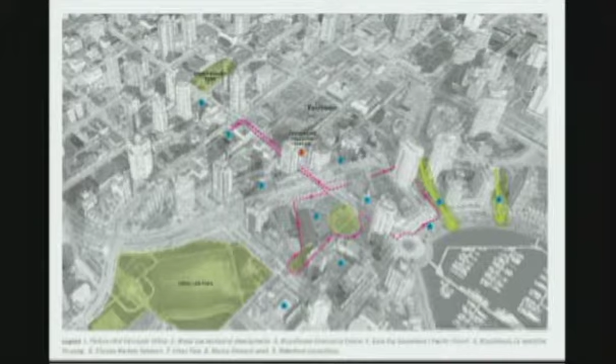And this is what I'm going to talk to you about today. Of course, it's nice to see graphics starting to overlap as well.

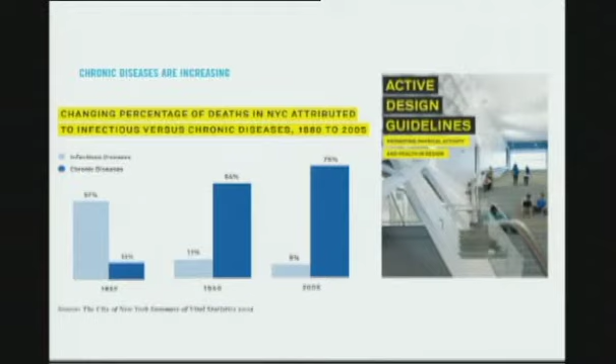I won't go into this because Andy covered it so beautifully. Cities are recognizing that relationship between design and lifestyle diseases, in this case chronic disease. New York City's been particularly good at this, and I'm imagining David and company are familiar with their active design guidelines - a wonderful compendium of how you start thinking about changing the city for active lifestyles.

So there are really 5 considerations that we bring automatically to our work when we're thinking about designing a community, and number 1 is access to nature. Cities aren't doing enough of this, and certainly with brownfield sites, it's an opportunity to be much more ambitious in your goals.

Connectivity is number 2, and I could easily have put walkability here, but it's all about giving people the opportunity to walk to as many places in their community as possible. And of course, this is also part and parcel of engaging with others in your community. So it's a big subject.

Diverse uses - Andy talked about mixed use and the importance of it, as did David, New York City and all its resources for people. You want walkability, but you also want the amenities and the services and the shopping and learning opportunities that go with it.

Housing choice is huge, and I know Naheed Nenshi talked just recently about the crisis here. That's something any new plan should be focusing on, especially when you've got a chance to build a critical mass of housing. And finally, renewable energies.

This is something our office has taken a lead role in. We have 8 sustainability research people within our office, which is a little bit unusual for a design firm. But we are very serious about helping cities understand how they can move that agenda forward.

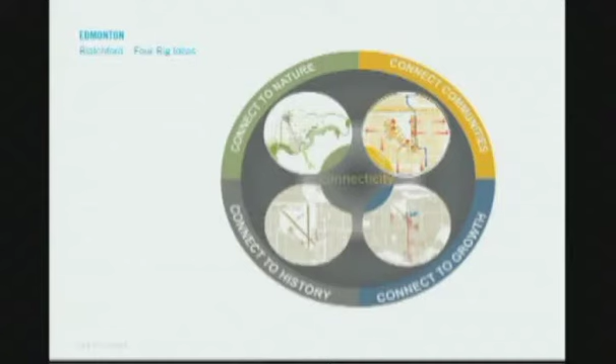And David used his arm. We thought as a team, how could we characterize this project in a really simple way?

And so we have a park, we have connectivity, we have access to growth and catalysts for growth. And finally, we have history, and I'll explain that.

Starting off at the top left, the overarching aim of the plan is connectivity. We, tongue-in-cheek, used the term connecticity to characterize that. But in a more serious vein, you can see in the top left-hand circle, Edmonton has a wonderful series of riverside parks, as does Calgary.

But what they didn't have at this site, which was quite a bit to the northwest, was any kind of significant open space. There were all the municipal reserve parks, but nothing really significant to bring the community together.

And so we saw an opportunity because there's an existing rail corridor that runs down the west side - you'll see in that circle - that would connect this park directly to that series of parks. We had an opportunity going east-west as well, and eventually created a 27-kilometer river-to-river loop, connecting this community back into the larger city.

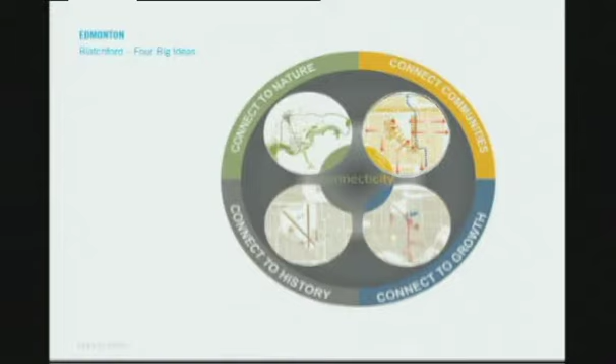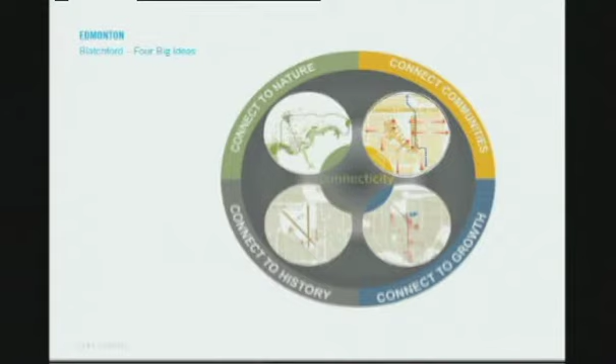Connecting to growth for a plan like this, any plan really, is huge. You want a plan like this to be viable, so you look around the site and ask what's here that can help us. Number one, the site's blessed: it's got Canada's largest technical institute, Northern Alberta Institute of Technology, 13,000 full-time students, soon to be 25,000. They'll be a partner on the site, bringing that student vibe and energy to the community. We also have a successful shopping mall immediately south of the site.

You wouldn't necessarily think this is a natural fit, but it absolutely is, because one of the hardest things to establish in a mixed-use community is new retail. Developers always struggle with that and end up subsidizing retailers for many years. With existing shopping here and a draw for people from all over Edmonton, there's a built-in attraction to this area. And finally, we're blessed by having Canada's largest critical care hospital just steps away - that's the Royal Alex.

And a rehab hospital right next to that. The idea is to bring many of the hospital services onto the site. There's a health agency that will be building there, and we're keeping our fingers crossed that former premier Alison Redford's idea of bringing neighborhood clinics to the city - I think the number was 143 for Edmonton - would be something that fits very naturally into this site.

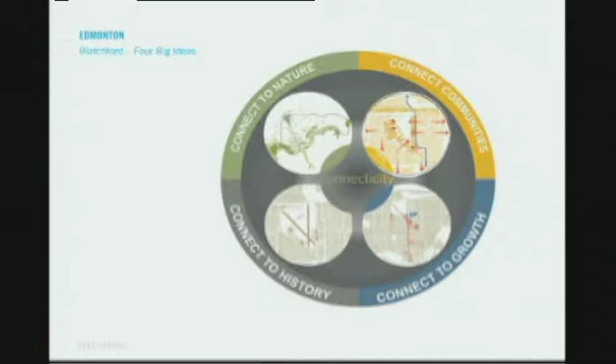Then finally, history. Connecting any community to its history is absolutely crucial. We used this for history because we chose to embed the runways into the plan rather than tearing them out and making them disappear. We also have the benefit of some World War II hangars, which are amazing places, the old terminal building, which is already a school, and the observation tower - these become artifacts on the site.

So this is the plan, and you'll see the park is really the centerpiece. There are three neighborhoods: on the westerly side, the agri-hood - the city had a huge ambition for urban agriculture, and this increases the city's urban agriculture by about 60%. The Technology and Research District is on the easterly side, benefiting from the LRT running right through the center and being immediately adjacent to NAIT. And finally, the town center at the lower neighborhood, right next to the mall, where most of the retail and commercial life will be - a natural synergy. It's going to be for 30,000 people.

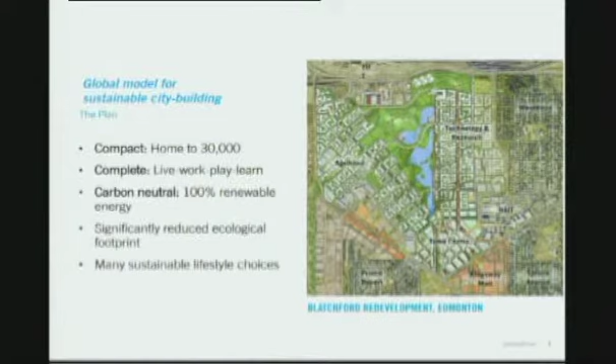In terms of amenities, it's live, work, play, and learn - things you want in a community where you can walk to them, so they can be part of your life. You can engage people and recognize faces every day as you make your way to shopping, to school, to work. We're also aiming at 100% renewable energy, meaning net-zero energy, again giving people those lifestyle choices.

This park allows people to really live in a park. 98% of the residents in this community are within a 2-minute walk of a park. That's because it's not just this park, but neighborhood parks beside it, and it's those connections to these amenities that are super important.

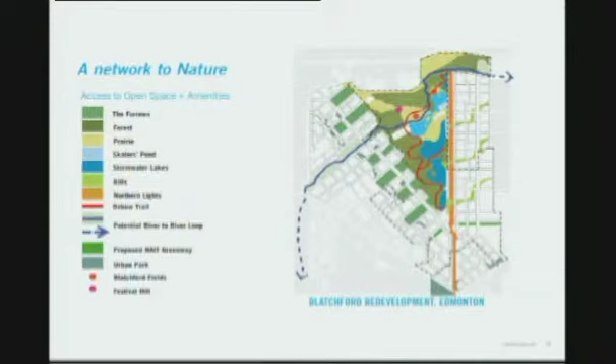As I mentioned, access to the park is super important. We have the main park, but there are also community parks that weave into the neighborhoods on all sides. The blue line is the river-to-river loop connecting this community back to the larger city. Lots of paths through the park, and of course all the roads lead to the park as well. Again, you see the Northern Lights, that orange band running down the right-hand side.

This is zooming into that Northern Lights amenity. It does have housing along it. We want eyes on the park and the streets, but mostly it's there for recreation and civic uses. There might be small galleries, small cafes, and some of the recreational uses are also imagined to be there.

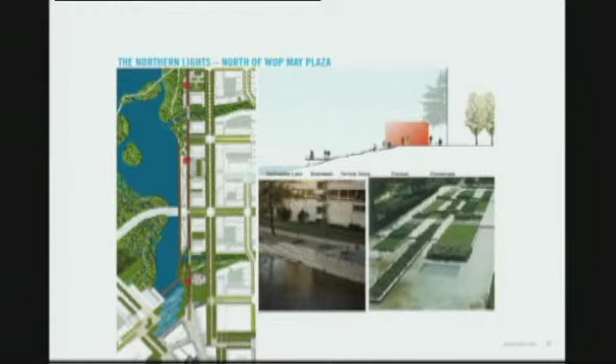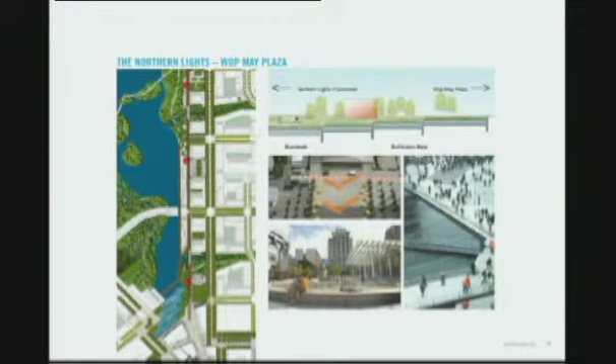This is moving down towards the epicenter of the community, which is Wop May Plaza—Wop May being one of the original bush pilots in Edmonton, celebrated here. Finally, the southerly portion of the Northern Lights starts to soften and become more green. This is where we're trying to bring a balance between this higher density neighborhood and access to nature.

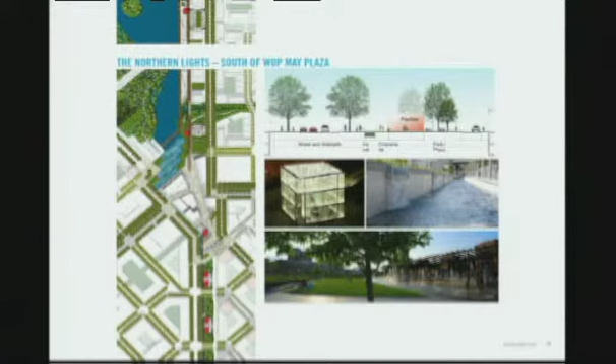I just want to go back to connectivity, which really has everything to do with mobility. What we try to do with the mobility networks in our plans is nest them as much as possible so they're interreliant, interdependent.

Here you can see the transit network on the left-hand side. There are two stations planned, and a possible third in the future. It's the purple line, and it goes through the site, crosses the Yellowhead Highway, and heads up to St. Albert—a real regional connection. All the other lines you see here: there's a tram that runs down the westerly diagonal neighborhood, and bus lines actually bringing people into the transit station.

To the right-hand side, this is complemented by the bike network. The policy in this community is that all of the streets, except the ones highlighted, are meant to be shared streets.

David talked about the idea of getting rid of streets and making it harder for people to drive. That's not the policy here. It's actually a policy of distributing streets—lots and lots of streets and lots of choices for drivers. They don't have to go barreling down great wide streets, but they do have to share streets with cyclists and generally drive a little slower.

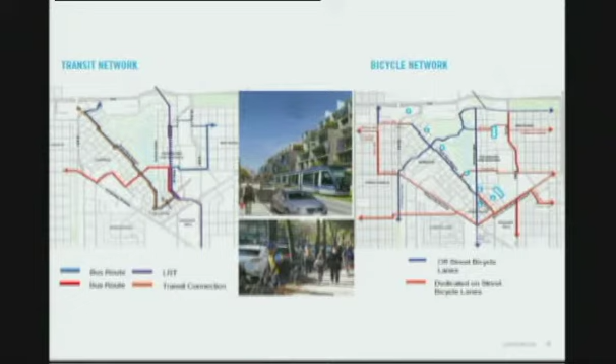The pedestrian is first in all of our street design—I won't get into the details, you have a great complete streets person at City Hall, and we're working on that with our city as well. The important thing is we're trying to make streets as intimate as possible for people. These great wide rights-of-way make it very difficult for pedestrians to feel comfortable.

In my experience on every single master plan, it's the engineers that need to be educated. They need their space in the street for their utilities, but if you work hard enough and long enough with them, you really can get them to compact it and lead to much narrower rights-of-way, which feel way more comfortable for people, especially in a windy environment.

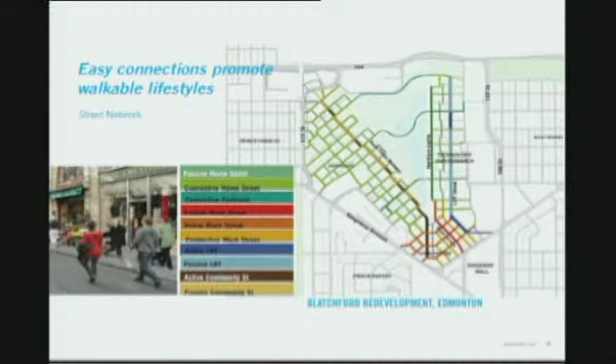We're working on one street in the Olympic Village that's 14 meters wide, the right-of-way. That represents probably the biggest war with engineers I've had in my career. But there need to be more of them, because it makes for a much easier walking and enjoyment of the streets.

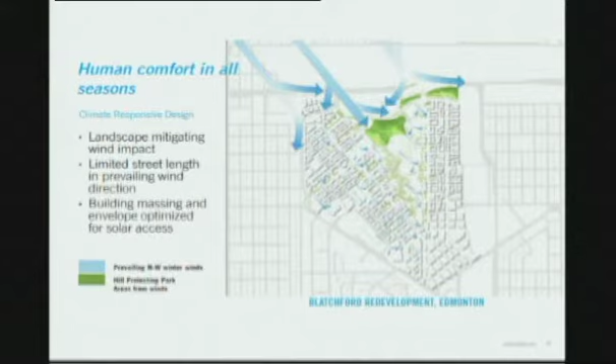And of course, in Edmonton, as in Calgary, climate responsive design of streets is paramount. We've offset the blocks so you don't get more than 3 blocks in a row, and they're relatively small blocks, so wind can't build up and make it uncomfortable to walk in the streets. That's absolutely key. We also have the huge benefit of the hill, which provides opportunities for people to use the northerly part of the park quite comfortably in the winter.

The other end, interestingly enough, we're currently working with the mall owners on developing a walkable community on their site. So it's kind of the dream of synergy for us.

I won't talk about it at length, but we worked very hard with the city to understand what this kind of mix would realize in terms of jobs. It stands at about 11,000 jobs, about 1 job per every 3 persons in the community. Not a bad target for a brand new community.

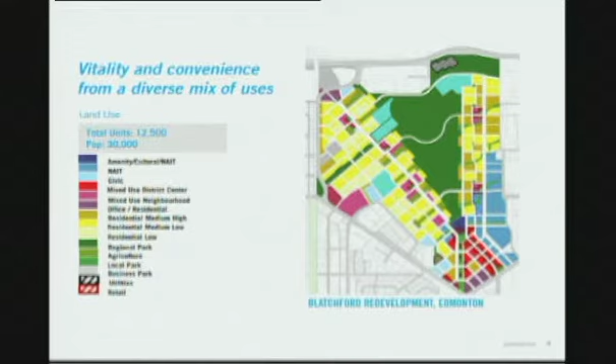There's also 3 schools, 1 elementary and 2 high schools, shown in light turquoise. And NAIT is a partner on this site. They're looking at bringing a lot of their programs into the town center, including their culinary program. They hope to have a bakery on the main street. They also have the biggest meat cutting course in Canada, so there's likely to be a butcher on Main Street as well. This opportunity to bring an educational institution together with the community is quite unbelievable. It's a real blessing.

So I just wanted to walk you quickly through the 3 neighborhoods, just to give you a bit more of a sense of the look and feel of this place. Starting with the agri-hoods, which is really focused on families. It's the lower density part of it.

You can see what we call Bush Pilot's runway in the top rendering. That's the primary armature built over the runway, showing the eventual tram route along that street. But you can see the attention to making it a great environment for pedestrians. That's our first focus, making it comfortable, making it easy for people to sit outside, to use the sidewalks.

They're very wide, and also give access to the trains themselves. Like Calgary, Edmonton has a high-floor system. We didn't want that to affect the edges of the street. We wanted to keep the street down at grade, so we elected to put the stations in the middle. That's not dissimilar to San Francisco's LRT system. It works very well. The stations are relatively discrete, and it means pedestrians in the street can move very easily.

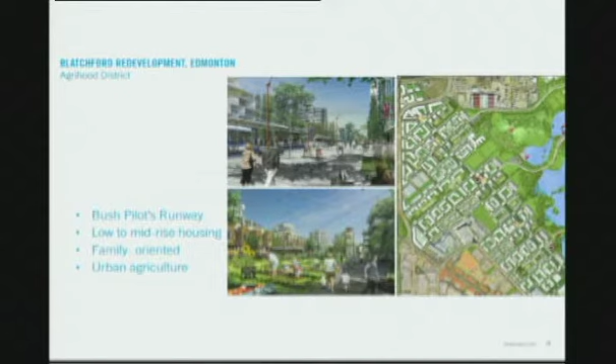The rendering at the bottom is what we refer to as the furrows. You can see the kind of agrarian geometry of this neighborhood, and this is where all of the urban agriculture opportunities reside. About 600 plots, but also some larger community-based plots, which you see in this rendering.

Very quickly on housing, just to give you a sense of the choice here, the city was very explicit. They wanted housing choice and did not want single-family housing. The only single-family housing has to be net zero, a handful of 50 demonstration houses. All the rest in this neighborhood are 2 to 4 stories, very comfortable walk-ups, and a lot of row houses.

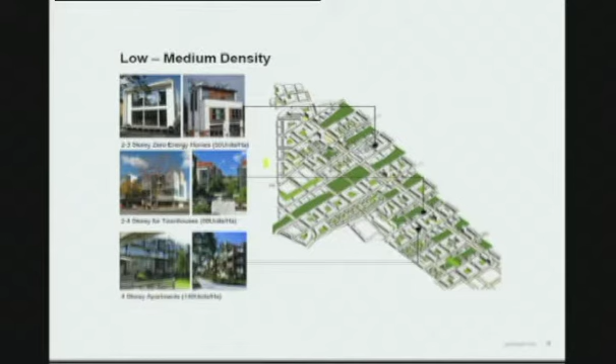The Technology and Research District, by virtue of the fact it's got the LRT running through it, is clearly the place where you want to put your density. This is where you want to make it easy for people to access transit, and it's also the place that serves the NAIT students who commute every day in and out of the campus.

The green space here that connects through to the main park is more of a meandering corridor, but it does have a job: it carries stormwater. The top rendering you see here is a depiction of one of those green fingers, a little more urban and dense than you might imagine, but nevertheless a kind of working green lung.

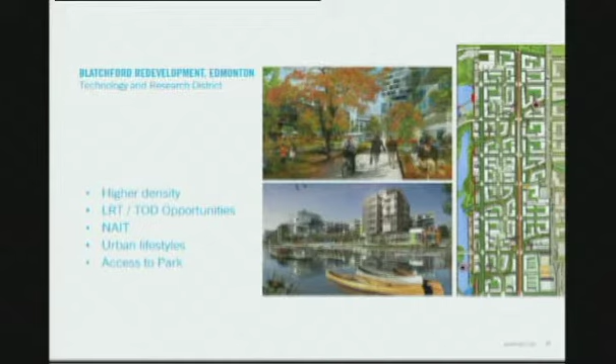At the water's edge, this rendering at the bottom shows what the Northern Lights might be like, one section of it, with housing. There happens to be a gallery in this one, and also the rowing club for NAIT's recreation program.

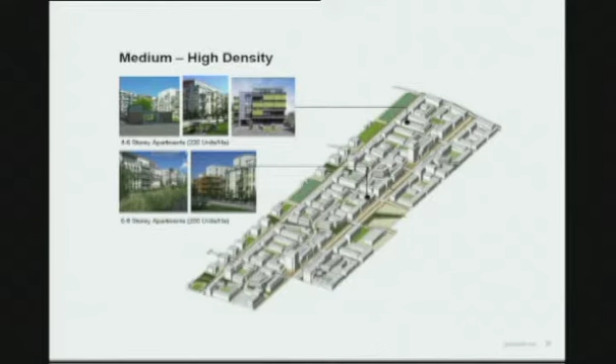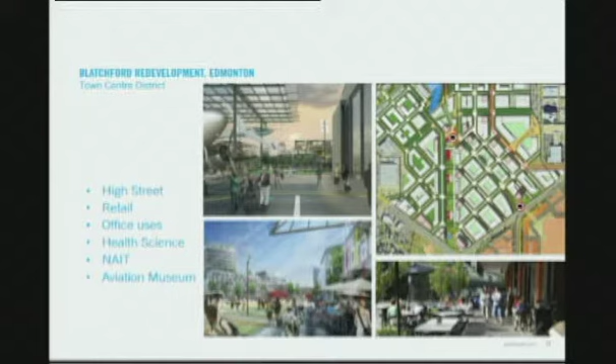The housing here, again, is higher density, more into 6 and 8 story forms that you'd see along that primary spine, getting into housing forms that would suit NAIT students. NAIT already has funding in place. They don't currently have students on campus, but they have funding in place for 1,200 beds, which we see as a major bonus here.

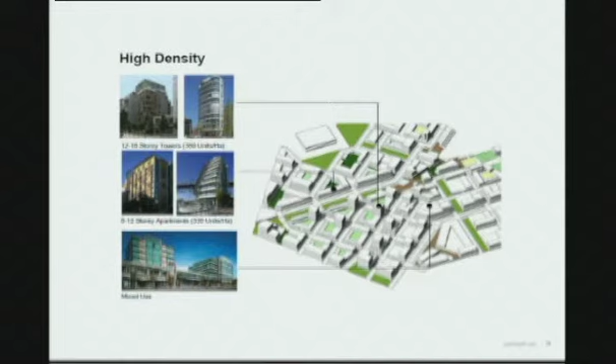The town center is a place for much higher density, and this is where we've helped the city with the rezoning. There is a requirement for 20% affordable housing. I know that isn't currently part of this city's policy—it's been in Vancouver for a long, long time—and we would certainly advocate for it in any city where we're master planning. It's one of the few ways to get affordable housing in place.

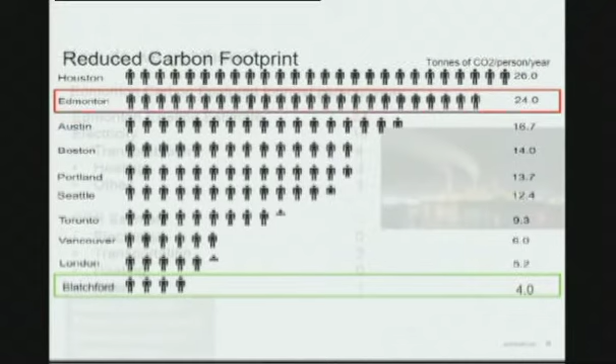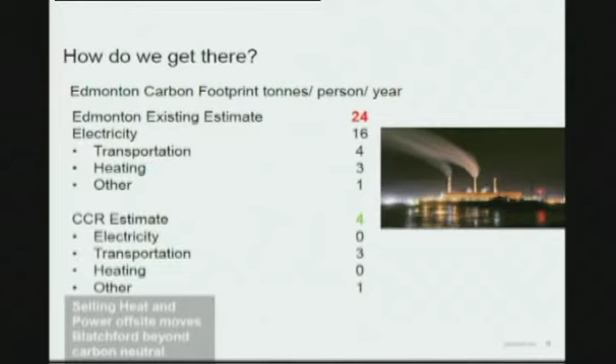We are reducing the carbon footprint here enormously with our renewable energies. Edmonton's currently at 24 tons of carbon per person per year. We know they can get down to approximately 4, equivalent to cities like Hammarby Sjöstad in Stockholm and other Scandinavian examples. One reason it's so high is because of where it gets its electricity—it's all coal-fired. That drives it hugely high, and to bring it down we're proposing a biomass plant that will rely on Edmonton's waste system.

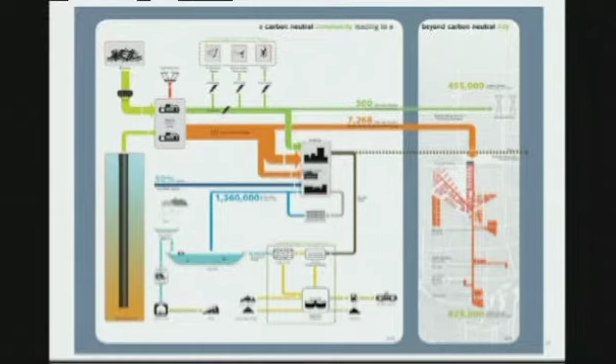What's really remarkable about this project from a renewable energies point of view is that it goes well beyond carbon neutral. That's because the proposal is to take the excess heat—and there's lots of it in these processes—off-site to the big consumers, including hospitals, government buildings, and some other educational institutions as well. So this is what the final plan looks like.

I have a few minutes to take you quickly through about 6 slides, but Nancy mentioned Saskatoon—we're taking a very similar approach there. In this case, they had a huge issue around trying to cross an active CPR rail right-of-way, 45 meters wide. They asked us for bridges. We decided to give them a park.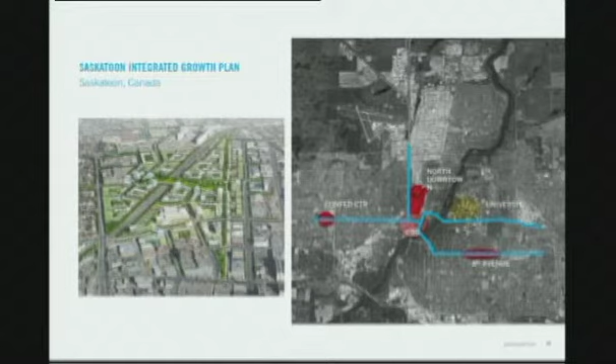It actually does carry roadways, but in terms of walkability, and giving people opportunities to cycle and walk between the two parts of this community, we saw this as the real glue and the healthy solution. On the right-hand side, we've just been hired by the City of Saskatoon to look at their integrated growth plan. This North Downtown Master Plan is the first step, but it means looking at their future transit opportunities and layering onto that all the development opportunities they can see in the city. It's an enormous project, but one I would advocate for in any city.

It's absolutely essential when you're trying to bring these things together. I won't go into the networks—that's the final plan. You can see it's a very mixed-use neighborhood.

Just the rendering in the very center, that's the foot of the land bridge taking you over to the other side of the city.

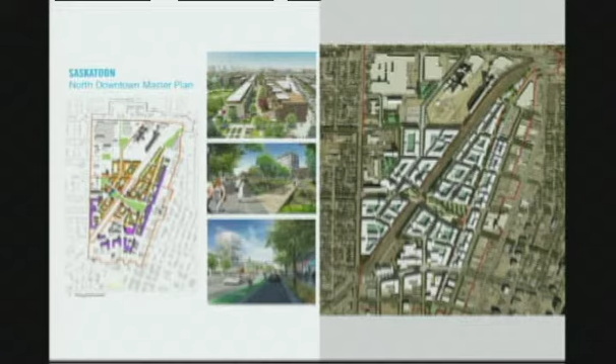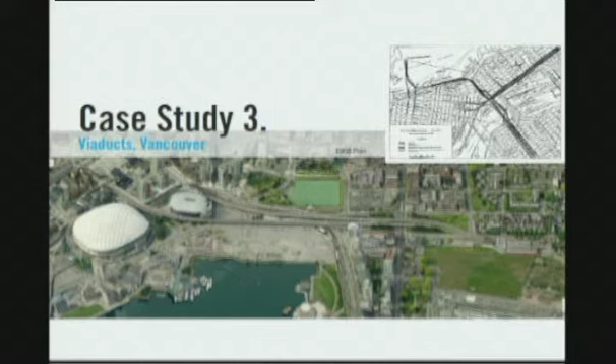And I want to end with 4 more slides, if you'll indulge me. In Vancouver, we were recently asked by the city to look at another brownfield site. If you know Vancouver at all, the top right-hand sketch shows a planned expressway to go right through the city that was done in the 1960s. Happily, there was a very active, very strong group of civic activists who came out against it, huge protest, stopped it, except for this one little piece, 1.25 miles long, that happened to sneak in. We call it the viaduct. You can see it, so it sort of bends around one of the stadia. It's right at the end of False Creek. And what the city wanted to know, the city owns the land on the easterly side. There's private ownership on the westerly side. They wanted to know how can we re-envision this?

So this is what we suggested. You may know of Aga Khan's campaign for pluralism. It's a tremendous piece of work, like all of his work, but I think what I find the most fascinating about it is he's advocating for major city parks in some of the most conflicted areas in the world. And the first one to be finished was in Cairo. Why? Because the way he puts it, these are the kind of beautiful but neutral places where you can bring people of disparate incomes, disparate perspectives, and disparate cultures into a place where they can enjoy nature together and engage with each other. It's a really simple message, but a really important one.

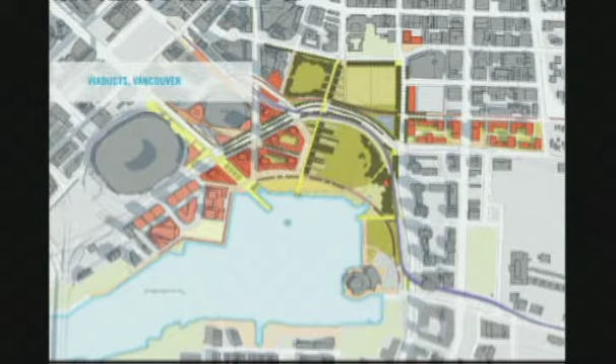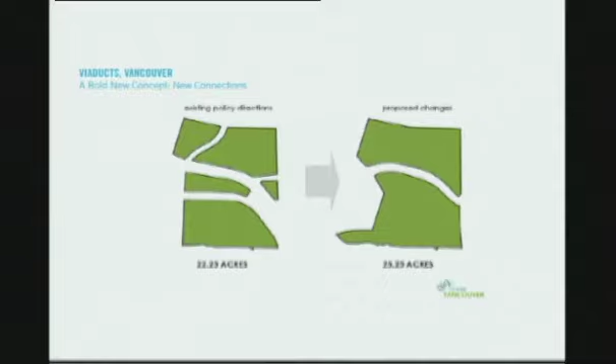This allowed for 2 city blocks on the right-hand side of the park that are city-owned. That's where affordable housing is going, as well as social housing. On the left-hand side, this is the last development parcels belonging to Concord, the developer that developed all of South Downtown, the original Expo lands, but a really nice way of bringing those 2 parts of the city together. It also brought roads together, so rather than 5 disparate parcels, it's now 2 major park spaces, and we worked very hard at making it easy for pedestrians to get across that road. This is the aerial view of that, just the connections through, and then finally a depiction of what the park might be like.

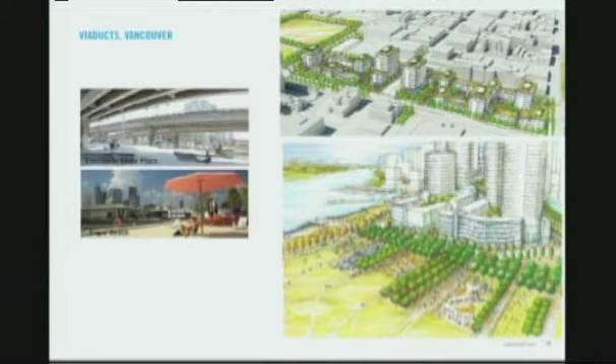Last thought I'm going to leave you with is that even with these major parks, super amenities for the whole city, it's really important to think about the local communities. You'll see that we have smaller parks that run along this kind of promenade down to the water, and those are effectively the parks that would become the new open space for a very disenfranchised community, the downtown east side, that suddenly will have access to this part of the city, and primarily False Creek, which is a great amenity in the city. So thank you very much. I really appreciated being here.

Thank you, Joyce. Some questions for Joyce. Joyce, what did you have to do with zoning in Edmonton? So the question from David was, what did you do in Edmonton around zoning to make this happen?

That's a really long answer, but the short answer is we helped the city write the zoning. It was a completely different zoning than they had seen before. The first argument was, why can't we bring all the other zoning that we already have together and just be done with it? And we said, no, not going to work. I mean, number one, just to give you an example, was the 20% affordable housing. That hadn't really been part of the zoning before. And so there's things like that. There's new parking requirements. A big part of this plan was reducing the parking demand. And so we went from 2 cars per unit to 1 car per unit.

Why? Because people are living close to transit. They've got lots of opportunities to walk. They don't have to be getting in their car all the time. And we have a park-once strategy, which means in the town center, you can conceivably park somewhere and only park there once and get all the services you need. Most people these days, especially in that part of Edmonton, they drive around to the grocery store, the department store over here, the shoemaker over here - they're all different destinations. So we were very much a part of that, and I'm very happy that we were there. It was a good outcome, and actually the naysayers at the city are now advocating for this kind of policy.